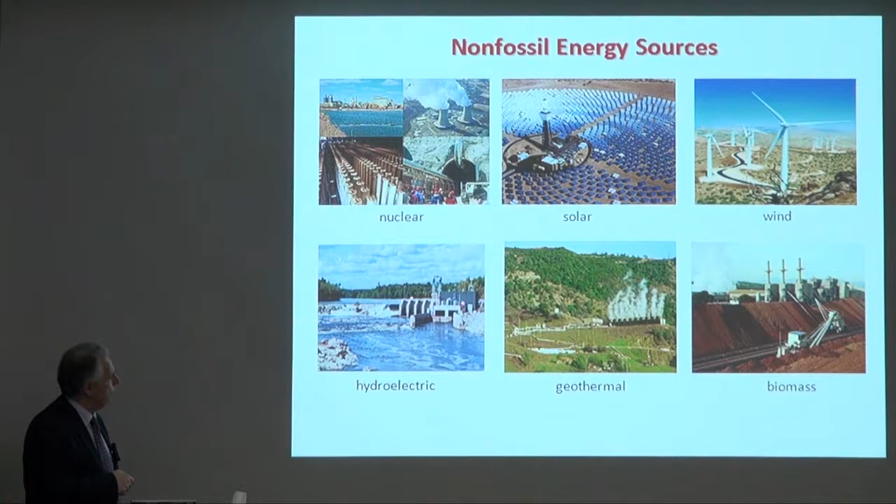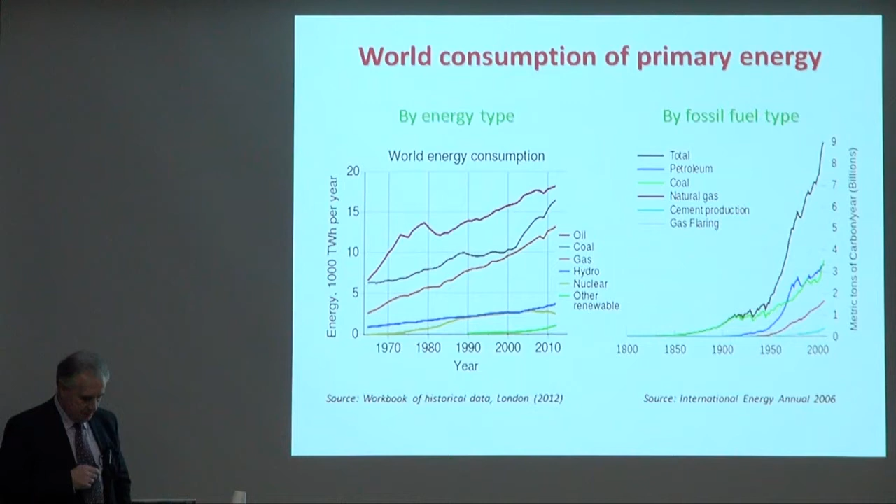Returning to fossil resources, it's instructive to recognize the needs and demands as the years go by. We can see the demand by energy type and by fossil type, showing a constant upward trend, even sharper if we go by fuel type. The most compelling conclusion is that oil, coal, and gas are the main driving energy resources in the world. Demand is increasing as more countries enter technological eras requiring more energy resources, while the availability of such resources does not increase proportionally, resulting in a sharp total increase in more recent years.

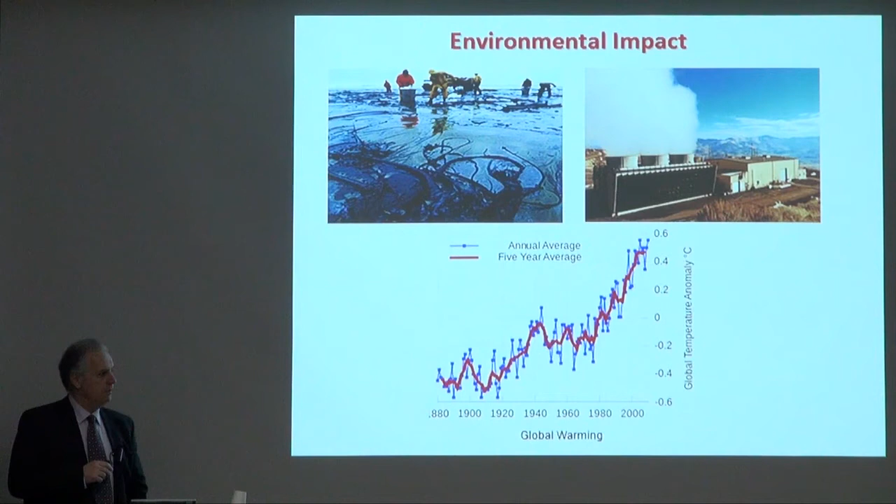This comes with an increasing penalty to the environment we live in. We have seen oil spills that deplete the water world, and emissions from various plants that deplete the atmosphere and the air we breathe. We have even more significant global changes, like the so-called global warming effect, where you can see a gradual increase of temperature on our planet, with implications affecting local microclimate conditions, such as in the North Pole, with more melting of ice affecting the underwater world and other parts of our planet.

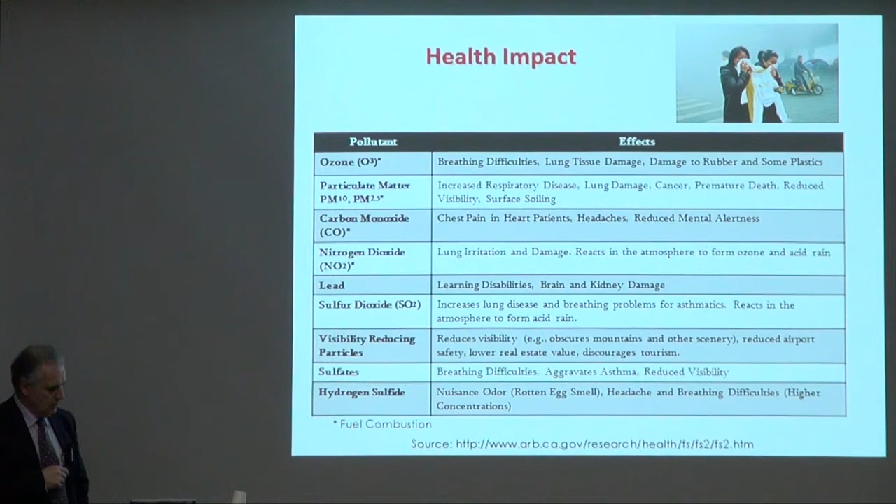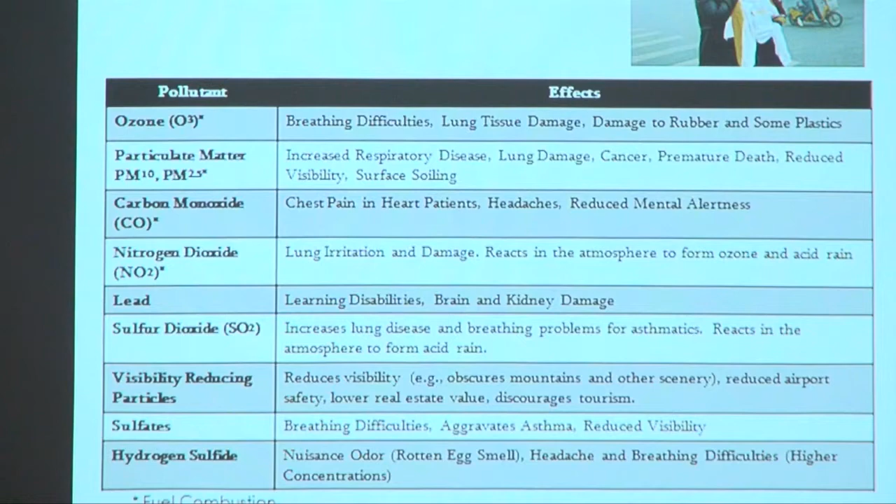In the case of health, an increasing concern in our days due to these emissions, we have depletion of the ozone layer, and emissions related to microparticles, carbon monoxide and nitrogen dioxide, lead, as well as sulfur, sulfates, and hydrogen sulfides, all emitted during the combustion process, whether from factories, plants, automotive applications, or even biomass.

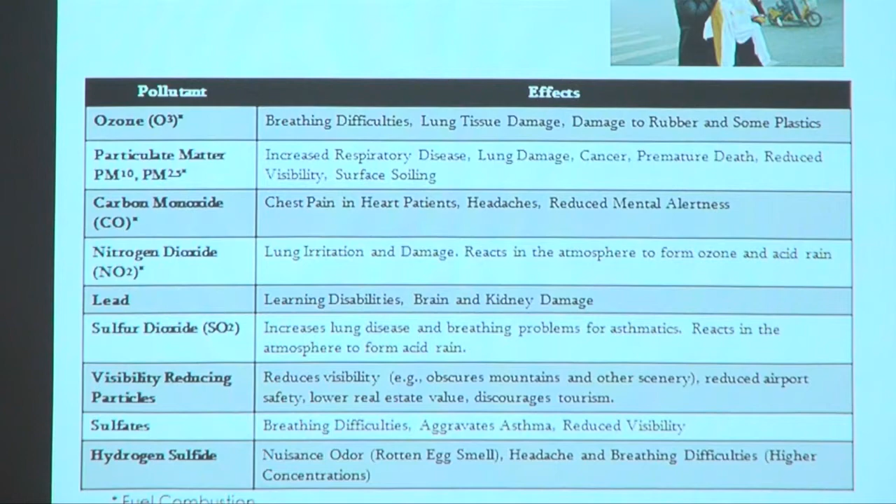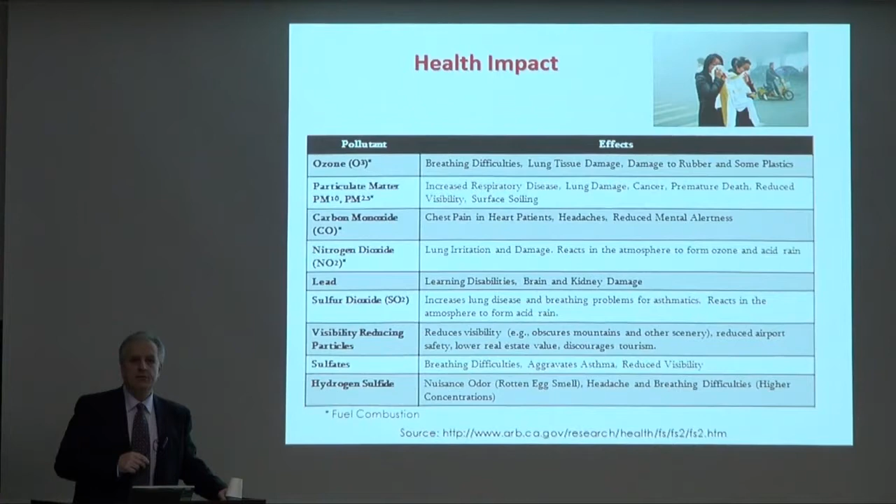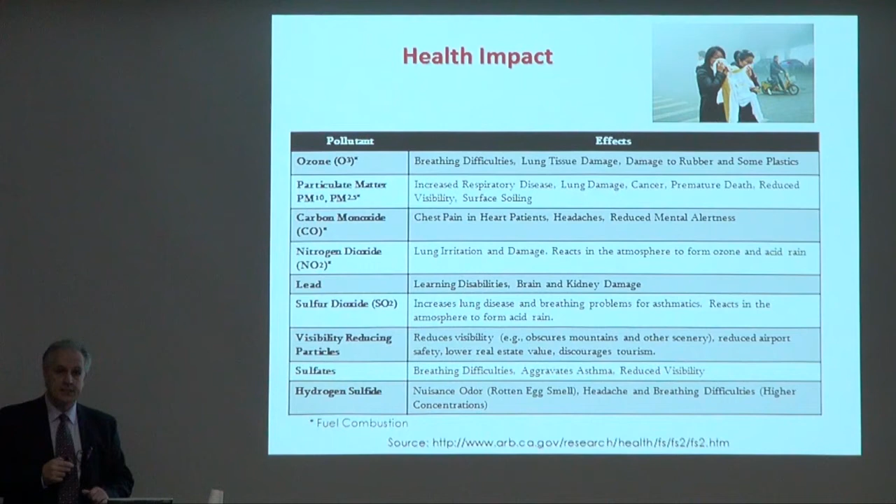Many people assume that technologies or resources that do not use fossils are going to be a solution to health and environmental problems, but they underestimate the process by which this energy is converted efficiently. The process behind involves a lot of manufacturing, which can lead to emissions of its own kind, and therefore this has to actually be counted into the equation.

The main air pollutants can be classified as primary and secondary pollutants. In the primary category, the main role is played by COx and NOx emissions, along with some others not in our control, such as those related to volcanic eruptions. Secondary pollutants are usually substances not emitted directly, but formed in the air by primary pollutants through interactions that take place. These emissions can lead to secondary products that occur in the atmosphere, including the ground level ozone effect, which is one of the reasons we observe photochemical smog effects.

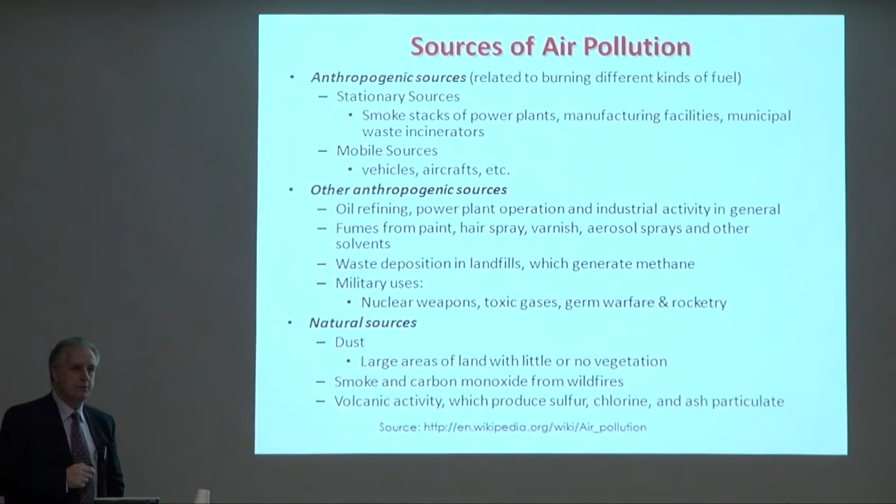Sources of air pollution are important to recognize, first as anthropogenic - these are the ones for which humans are mainly responsible, created by human needs. So we have smoke stacks of power plants, manufacturing facilities, and mobile sources of pollutants such as vehicles and aircraft that produce them. These have come from our needs for a different style of life and different comforts that require different technologies, and these technologies do not come free of penalties - penalties that are depleting our environment and consequently impacting our health.

Other anthropogenic sources are listed here, including nuclear and toxic gases. Fertilizers that are used also present some health problems, and some other daily used products that we underestimate also contribute their impact. In fact, I would add air conditioning to this list as one of the main means of depleting the ozone atmosphere - one reason being that the lubricant used for air conditioning contains fluorocarbons, and the fluorine released is one of the main factors that depletes the ozone in the atmosphere.

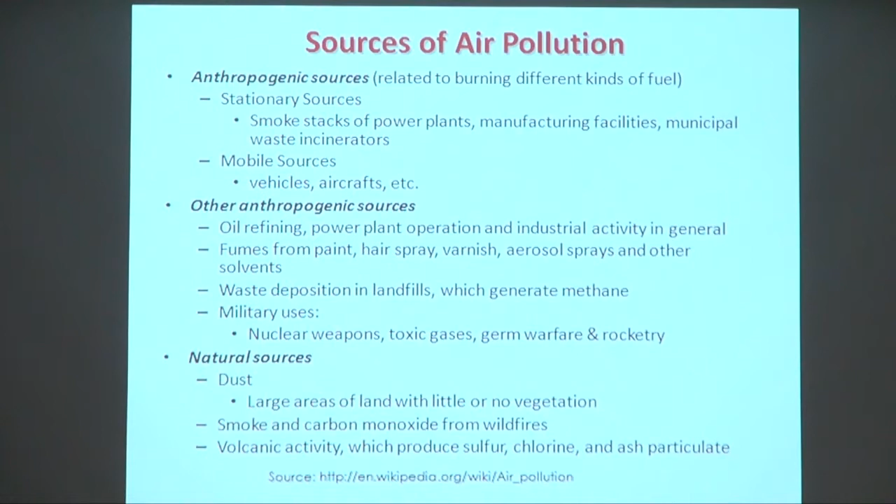We also have some natural sources that add to the list of sources for air pollution. So here we can see air pollution emissions.

As people become aware of these problems, you can see a trend to minimize total emissions, but nevertheless this trend is not as steep a slope as we would like, especially as statistics of various health problems increase—we started collecting them since the 80s—and recognize the importance of even these levels of pollutants still being very high for our health.

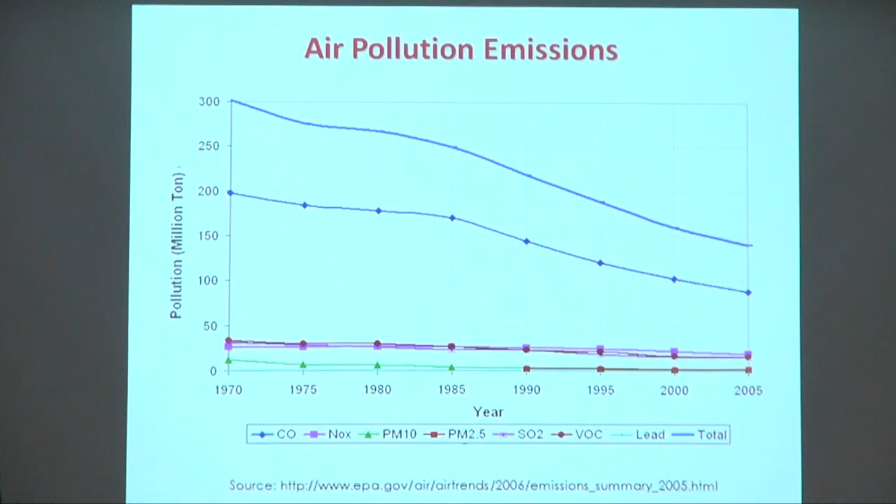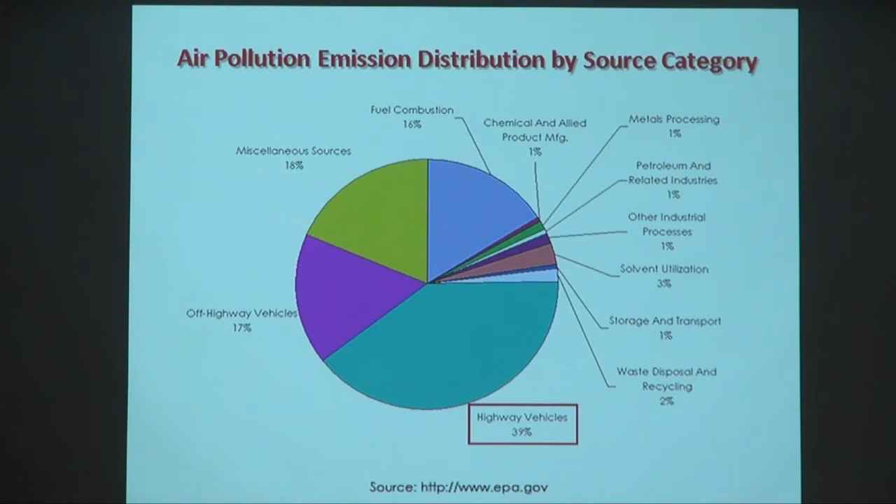If we look at this by sector or source category, we can see the main category is highway vehicles, constituting a major part, and also off-highway vehicles and other miscellaneous sources, as well as production manufacturing plants. These four are the main sectors from where the largest level of pollution and environmental impact is coming, and of course they are drawing the most attention.

And if we look at the pollutants associated with emissions, then as expected, we see CO and NOx being the main contributors.

So having reached that point, it is clear that if one needs to begin to address this problem, he or she will have to draw attention first to the biggest slice of this pie, which is air pollution, especially associated with automotive—either highway or non-highway vehicles—and manufacturing plants that produce emissions contributing directly or indirectly to CO and NOx. So my talk today is going to focus on these products that result from the automotive sector.

But before I do that, let me add that the increase of these emissions of CO and NOx, in terms of some quantitative numbers that add up to these percentages, is an indirect effect of the presence of elements like phosphorus and sulfur, which are main ingredients in additives used in synthetic oils for gear oils or engine oils, to maintain efficiency and optimum combustion by reducing friction and wear between various interfaces of these mechanical systems. But these additives, while effective in lubricating vehicle components, contain phosphorus and sulfur, which turn out to be

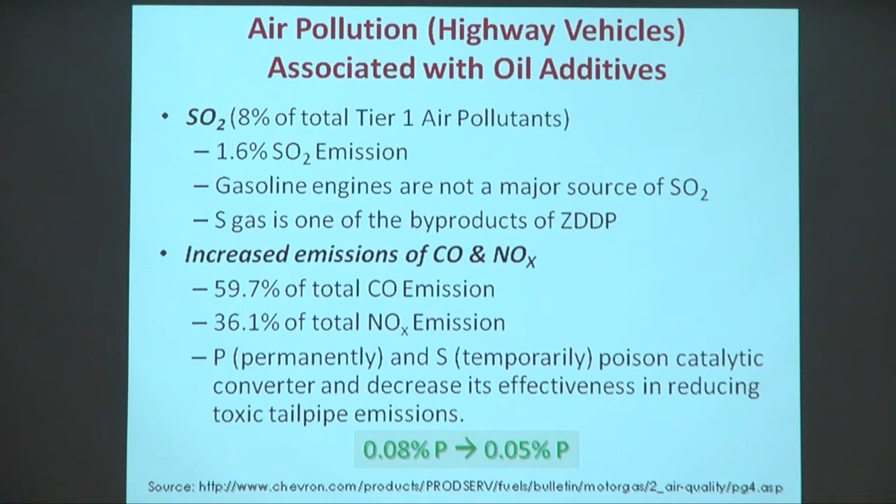So one of the challenges I will try to address here is: what if we try to do a gradual step in the right direction, which appears huge for the oil industry, to reduce some of these important elements that have made these additives, for more than 40 or 50 years, the prime additives this industry uses. In particular, phosphorus, to reduce it by about half in terms of its content. You may be surprised these numbers are very small, but additives represent a very, very small fraction of the content of oils, yet their effect is much far-reaching.

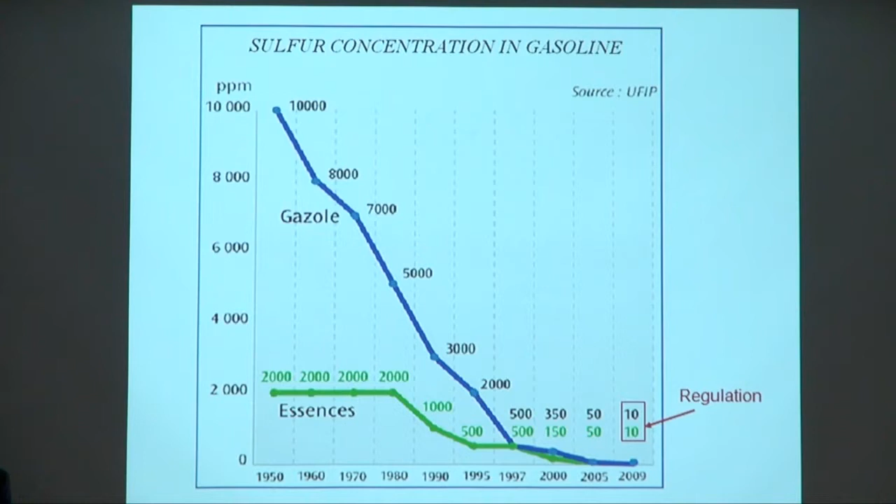And so here you can see the attempt to reduce the presence of sulfur in gasoline, to clean the sulfur gasoline better, with the years approaching tighter levels, and here is where the present levels of regulation exist.

So let's focus on the theme of how we can reduce air pollution contributed by highway vehicles, and what possible scenarios one can immediately identify. Well, one would be to reduce highway vehicle usage, but this appears to be going in exactly the opposite direction. More vehicles are appearing on the highway, especially as people find it easier to buy them, and also because public transportation in many parts of the world is not as efficient as it needs to be so that vehicle use can be avoided.

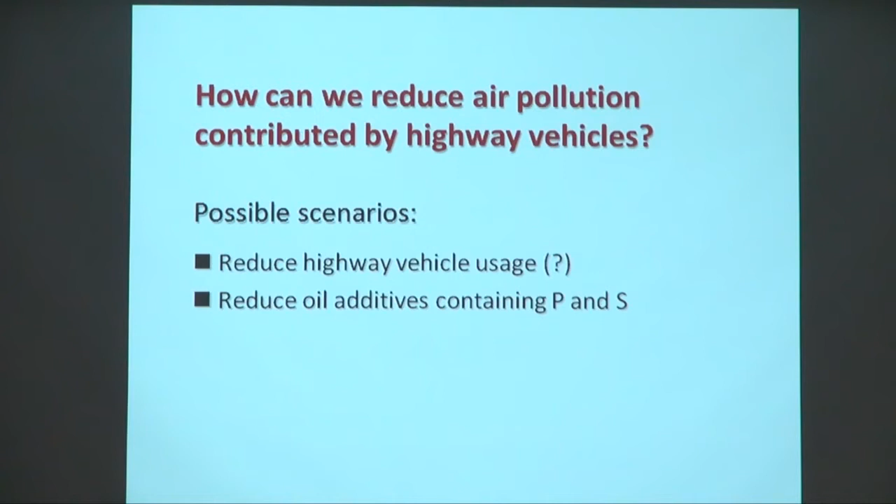Another possibility that seems more plausible is to reduce the causes of the problem. As in the medical field, you have to identify the cause of a disease in order to cure it. And this, as we've seen, appears to be these ingredients, these additives, which are phosphorus and sulfur.

The most common additive used by the automotive industry is zinc dialkyl dithiophosphate, a name longer than my last name, which fortunately has an acronym, ZDDP, while I don't have an acronym. So we will refer to it from now on as ZDDP. This is a long chain molecule that contains phosphorus, zinc, and sulfur, and it's incorporated into synthetic oils.

Today we will learn what its main role is in protecting engine parts by reducing friction, therefore improving the efficiency of the engine, and improving wear resistance by forming protective tribofilms. I refer to them as tribofilms because they form through the rubbing process. Tribo, as in tribology, which we mentioned before, so it's a chemistry that is not equilibrium chemistry. It involves rubbing between the surfaces.

The rubbing process activates those surfaces, causing these molecules incorporated into the synthetic oils as additives to break up, react locally with the surfaces, and form these so-called tribofilms to protect those surfaces.

So the pros and cons that come with these additives: they reduce catalytic converter poisoning, increase lifetime efficiency, reduce CO and NOx emissions, and reduce SO2 emissions. So if we reduce them, we can accomplish many things that point in the right direction to minimize emissions and improve our environment.

But the con is that we will probably reduce the wear protection. These are also referred to as anti-wear additives. And we will reduce the life of the engines, the reliability of the engines, and so forth. So how can we gain all of this without losing all of these things?

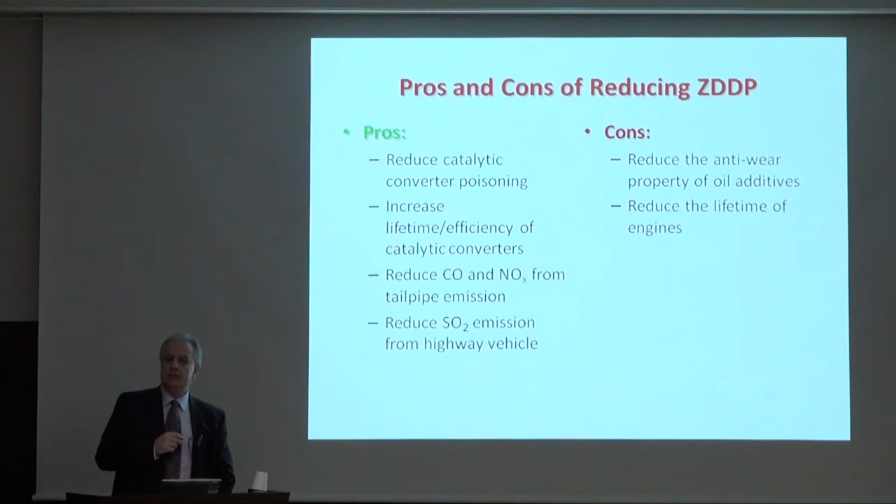Obviously that requires innovation. And that's one message I want to send to the students: always try to think out of the box. This is a term we often coin in the US, indicating that you should not always follow conventional wisdom or the learned approach, because that only gives you incremental changes. Sometimes to revolutionize a field or direction, you need to think out of the box differently.

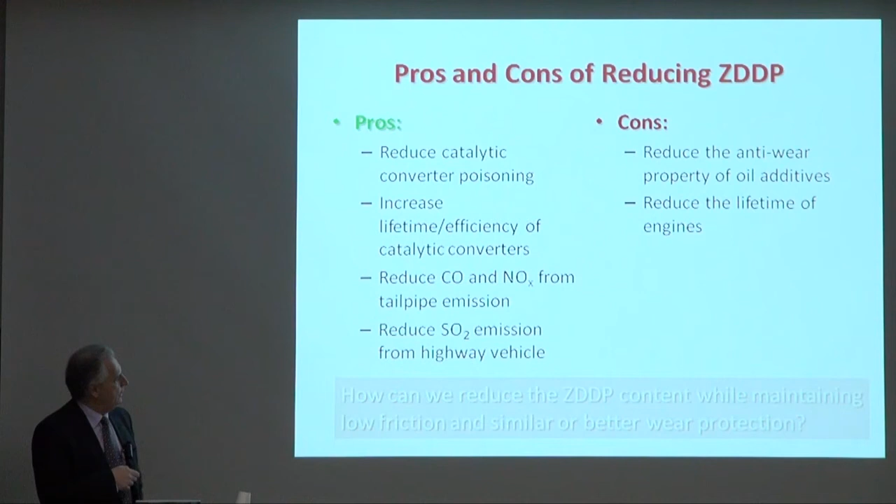In cases like this, you have to think out of the box, and instead of trying only to reduce the content of these and worrying about these problems, be innovative and think of what other elements that are not depleting the environment can be used instead of phosphorus and sulfur. So how can we reduce the content while maintaining low friction and low wear, better wear protection?

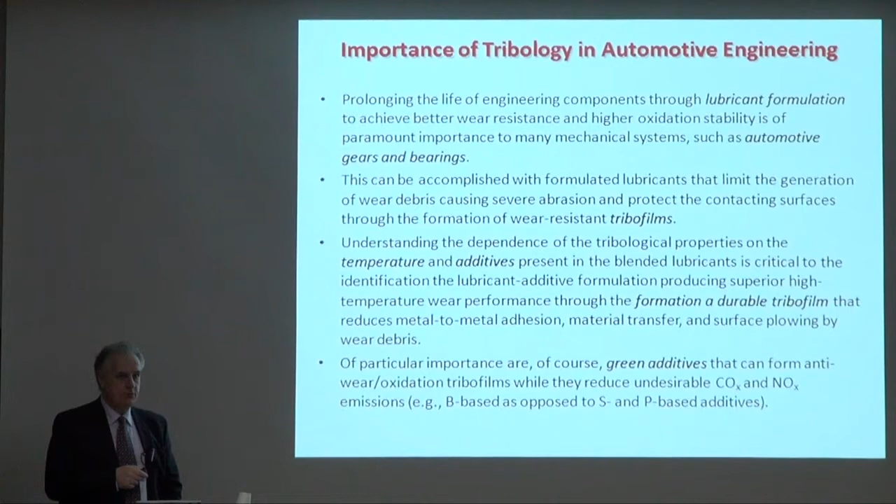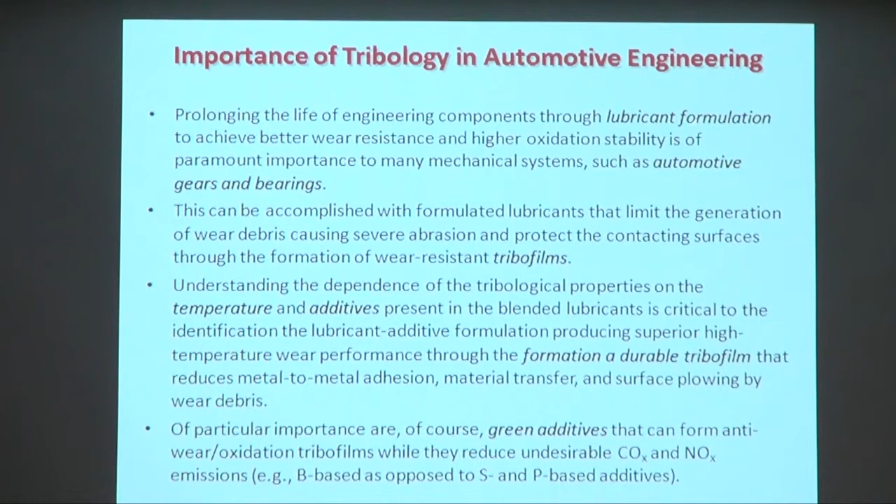Okay, so let me summarize this first part by indicating the impact of tribology in automotive engineering. Because this is a busy slide, I will focus on the italicized words. We're looking at lubricant formulations that will achieve better protection for automotive components like gears and bearings. This can be accomplished through formulated synthetic oils.

These oils will produce wear-resistant tribofilms that protect our surfaces, but we want to make them without additives that can be hazardous for the environment. They have these additives that, at the temperatures we'll encounter, react to form these protective films that will still lead to durable tribofilms without containing phosphorus and sulfur additives.

An example you'll see me present today is using boron instead of phosphorus. We've seen earlier that reducing the content of phosphorus by half is a major step in that direction. Let me give you a quick reasoning of why we use phosphorus and sulfur and what role they play, which will become more obvious later.

Sulfur forms sulfides and sulfates, which are easily shearable phases. If we have those in the tribofilm, we'll produce low friction. Phosphorus forms hard, glassy phases, which provide wear protection in the tribofilm. So the tribofilm is a mixture, a biphasic material made of soft and hard phases that synergistically provide low friction and wear resistance. But because of the softer phase, it wears out, and that's why it's referred to as a sacrificial film.

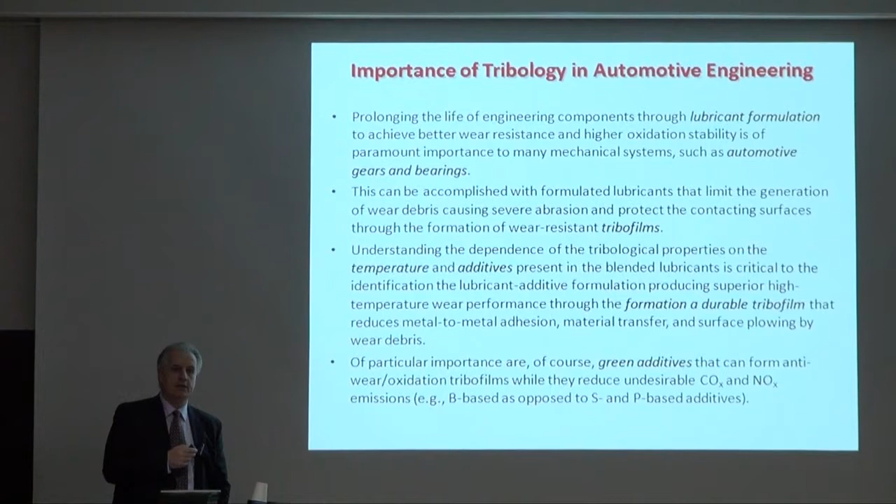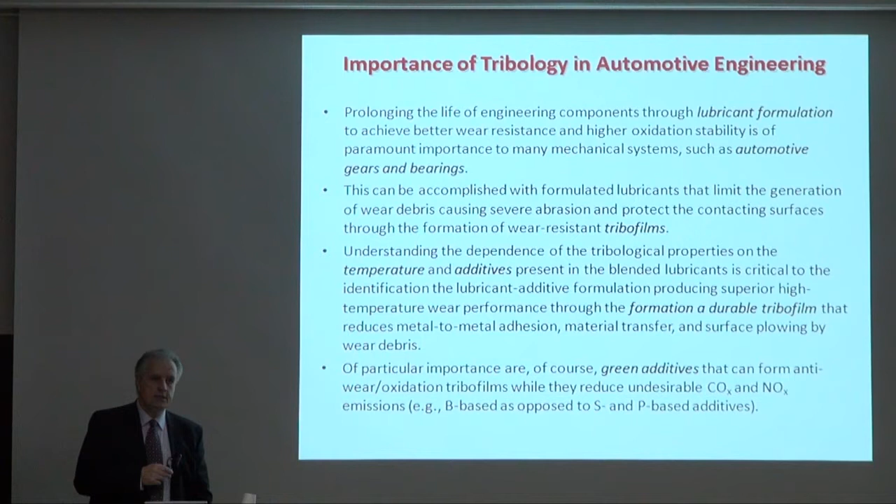The role of the additives is to immediately intervene and reform the film everywhere on the metal surface that has been removed. There is a continuous affinity of the surface for these additives, which are broken up and activated by the rubbing process to strongly adsorb on the exposed metal surfaces every time the tribofilm is locally removed or worn off. This process leads to continuous reformation of the tribofilm, which is why it's referred to as a sacrificial film, because it sacrifices itself to protect the precious engine metal underneath.

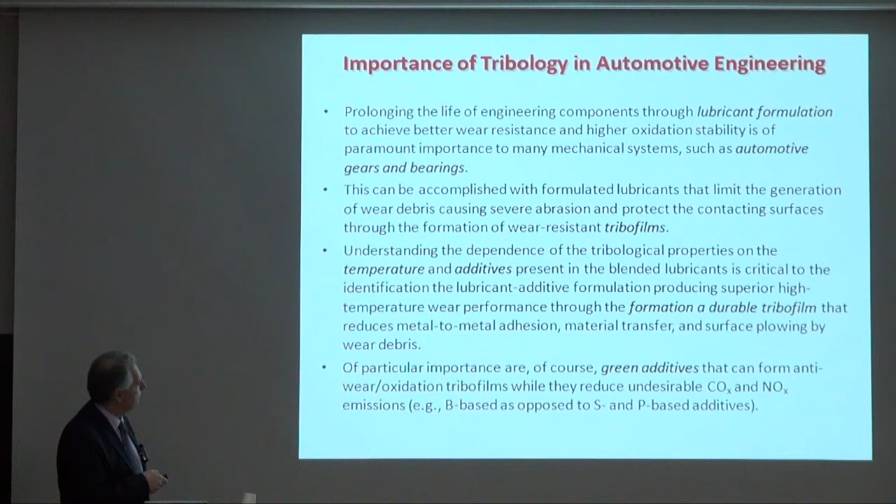So why would surfaces wear out? We ask the question: why is energy dissipated when we bring two surfaces in contact and begin to slide one relative to the other?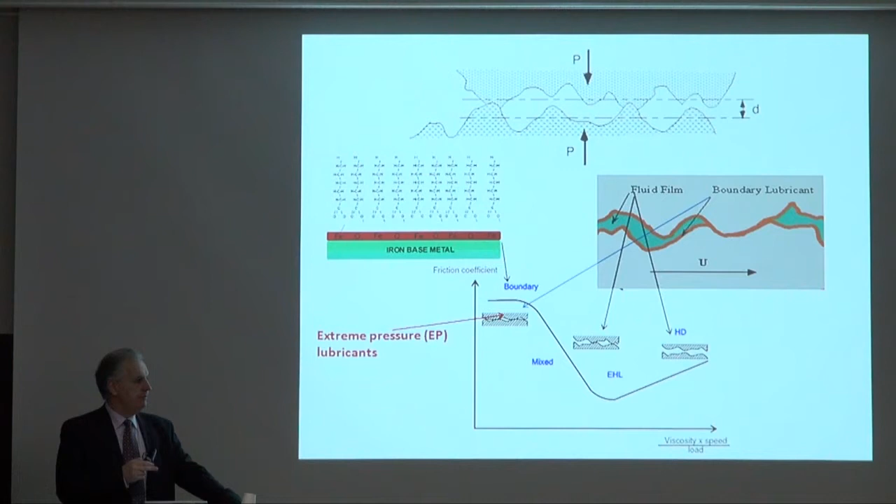If we look closely into these interfaces, we observe that although macroscopically these surfaces have been faced, polished, and smoothened, and are very well maintained in terms of tolerances, at the microscopic scale they still have some roughness. Regardless of how much you press those two surfaces against each other, they will never become 100% in full contact or full mating, but will continue to interact at the higher peaks of these protrusions, which I will refer to as asperities.

So asperities on each surface come to interact with the asperities of the other surface. If we calculate the pressure transmitted through a seal based on its apparent area and the thrust load applied, we'd be surprised to find wear of this seal despite the pressure being very low, because the actual pressure the seal sees is much higher due to these stress raiser points, the asperities.

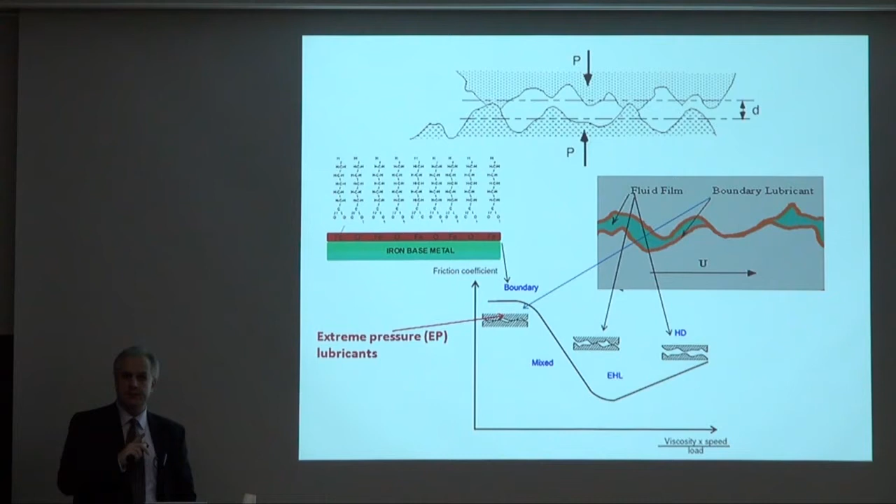You can think of the load as parallel lines of constant stress. This is the nominal stress you calculate by dividing the load by the apparent area. Think of this stress as current lines passing from one surface to the other. There is a vacuum here, a void, and they cannot pass through it because it's a high dielectric material, so they must detour and pass elsewhere. This detouring causes a traffic jam, which in more scientific terms represents stress concentration or stress gradients. High stresses arise because the stress lines that were going to pass from the void all pass from the same point instead. So the local material sees 3, 4, even maybe 10 times higher local pressures than what we think the material is experiencing.

If we add a tangential force when we start sliding, you can see how easy it is to begin wearing out this material, and the process starts at these microscopic asperities where the two surfaces wear out. Then the gap increases, and we get leakage into that seal, or vibrations into the bearing surface that has been roughened as these asperities are removed.

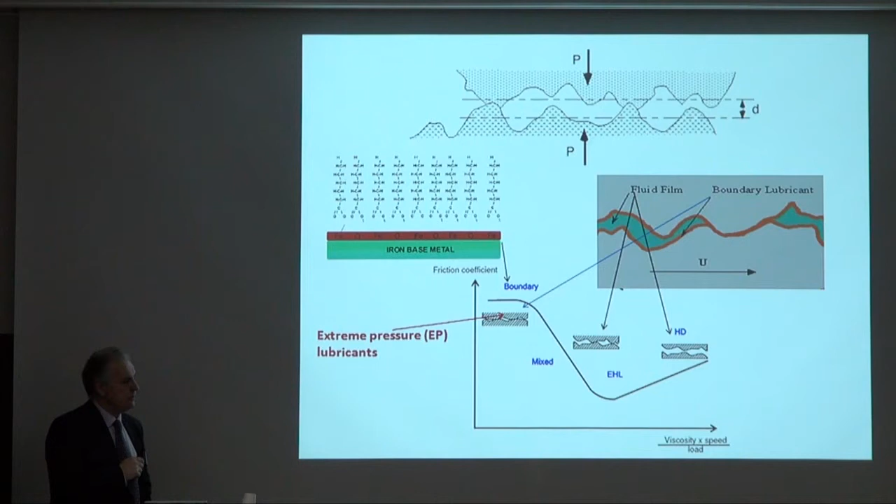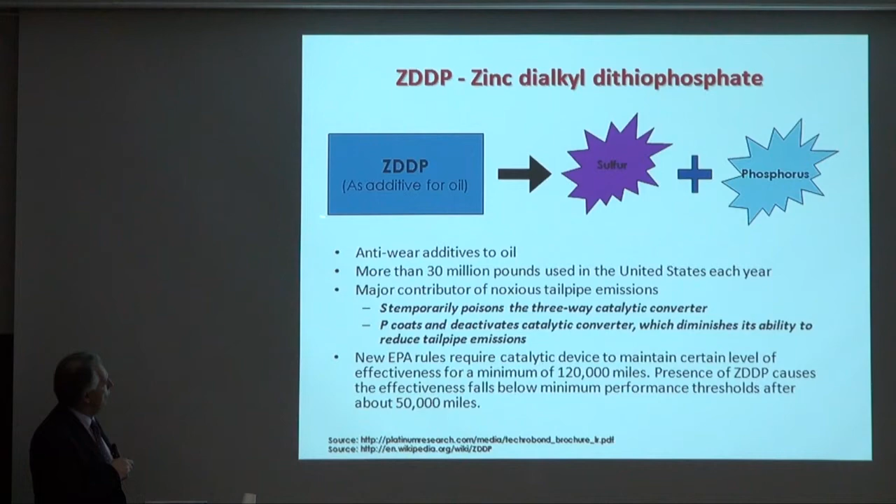So we said zinc dialkyl dithiophosphate is one of the prime additives in oil, but unfortunately it has sulfur and phosphorus. Although this is the anti-wear additive in oil, and we sell more than 30 million pounds per year in the US alone, it's a major contributor to tailpipe emissions.

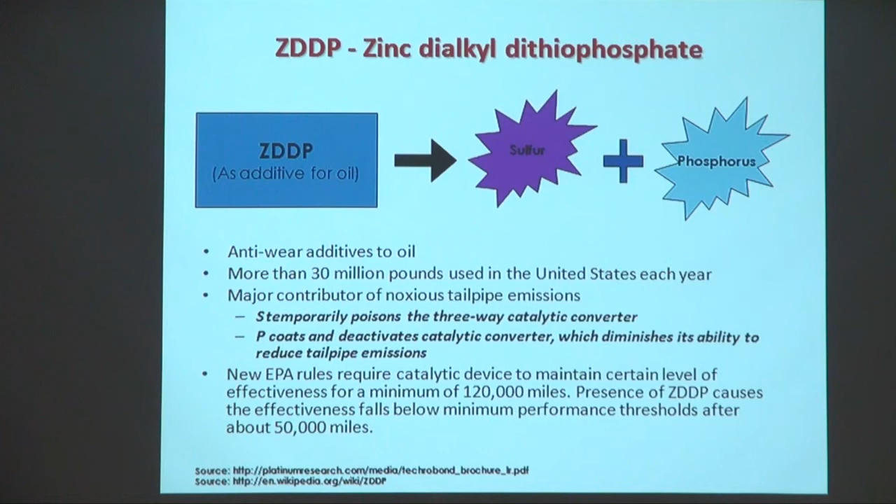The sulfur temporarily poisons the catalytic converter, and the phosphorus coats and deactivates it. That reduces its ability to reduce tailpipe emissions and also upsets the optimum combustion cycle of the engine, causing further implications.

So let me start by looking at what we can do to address this problem for gear oils, and later in my talk I will also refer to synthetic engine oils.

Let's look at a gear lubricant. A base gear lubricant, referred to as base gear oil, usually contains very small amounts of sulfur traces, to a point that if it was used by itself, it would not be a problem for the environment.

Here we have also white oil as a control sample. This is the most inert oil you can have. It's basically rich in naphthenic hydrocarbons, an oil that does not react with the surfaces. Only the molecules will tend to attach to the surface.

Blends 1, 2, and 3 are the base oil on which we incorporate a new material, boron, with reduced levels of phosphorus, compared to the zinc dialkyl dithiophosphate.

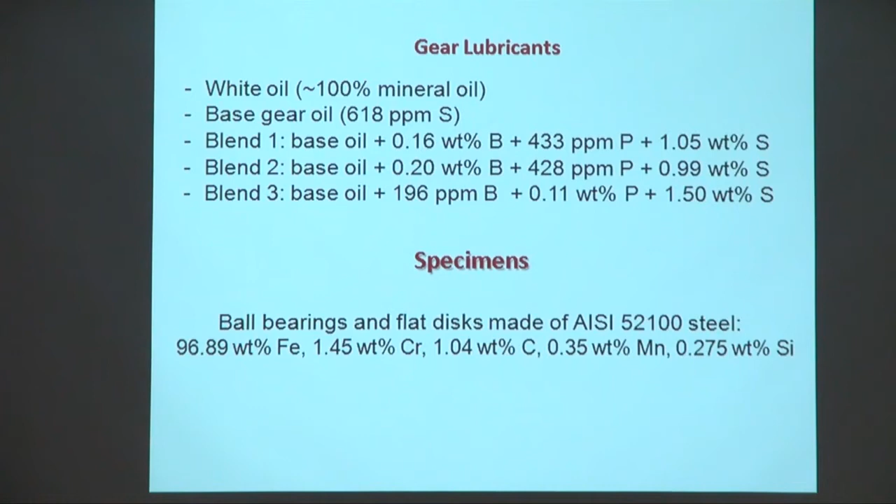So we will be looking throughout what I present here at bearing steels, standard bearing steels. We are not going to bother with tweaking the chemistry of the steels, typical 52100 balls sliding against a disc in the presence of these different oils.

So let's take first a look and see what typical features we can see at low temperatures and high temperatures. You can think of this as the engine being relatively cold when you start the car, and this could be a hot, maybe more than the typical high temperature, sort of an upper bound, worst case scenario of the temperature of the engine after steady state.

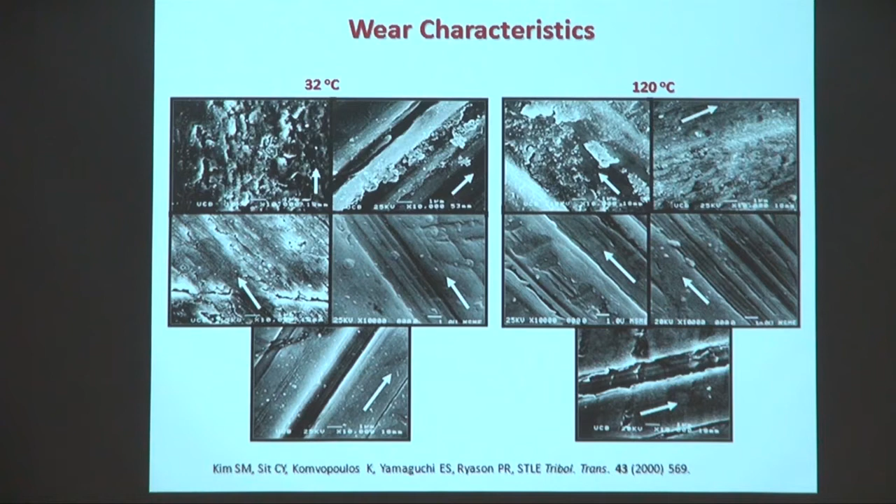At higher temperature, chemical reactivity increases. But the actual temperature could be much higher because of the rubbing process. When the surfaces slide at their asperities, the local temperature is much higher due to frictional heating. So the actual temperature is not just 100 or 120 degrees, but could be much higher during sliding, and that is a critical factor to induce these reactions between the additives to form the tribofilm.

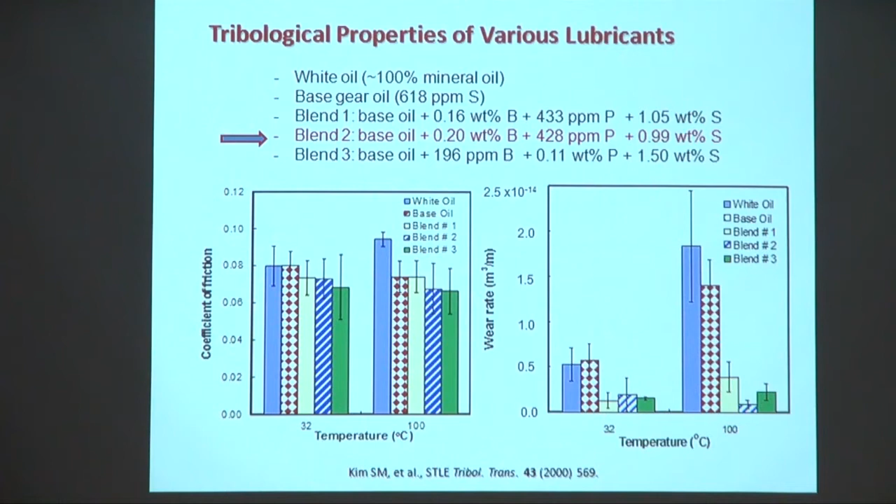This is a difficult experiment in every sliding case, I should admit, because it's a field where you don't actually see your specimens. In about 90% of engineering or biotechnology fields, we can see our specimen or the surface of the specimen. Here we're dealing with interfaces, sliding interfaces, which are hidden. So we need to develop in situ methods to determine what goes on in these interfaces as they slide.

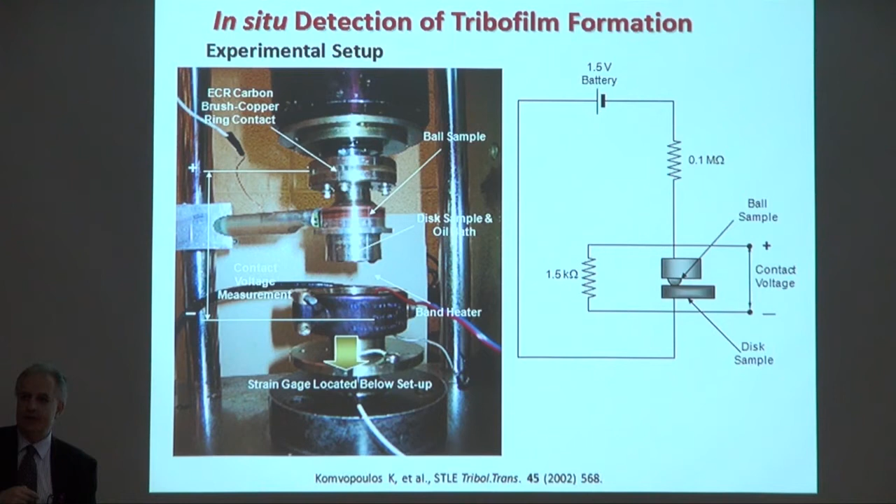Usually sulfides are conductive, phosphate phase is insulating, borate is also insulating. So if the film contains phosphates or borates, it should give a high contact voltage, increasing as the film begins to form. If it doesn't contain any of these, even though I've incorporated them as additives, that means the reaction did not occur and the tribofilm did not form, or it was removed much faster than it was trying to form by the wear process.

So let's take a look at what happens. I took out the mineral oil, so now we have only the base oil, and then the base oil with these different formulations. Remember, the second was the one we saw was the best performing. If we look at the coefficient of friction and contact voltage for the base oil that has very little sulfur, we see high friction and fluctuating friction, with 0 contact voltage.

You may ask about the iron oxide, whether it's an insulator and should have produced a contact voltage. This is, first of all, very thin and very fragile. If it's something very thin, you can still have tunneling through it, so you get zero resistance. Or more importantly, if it's fragile, it's removed, and therefore you have no voltage.

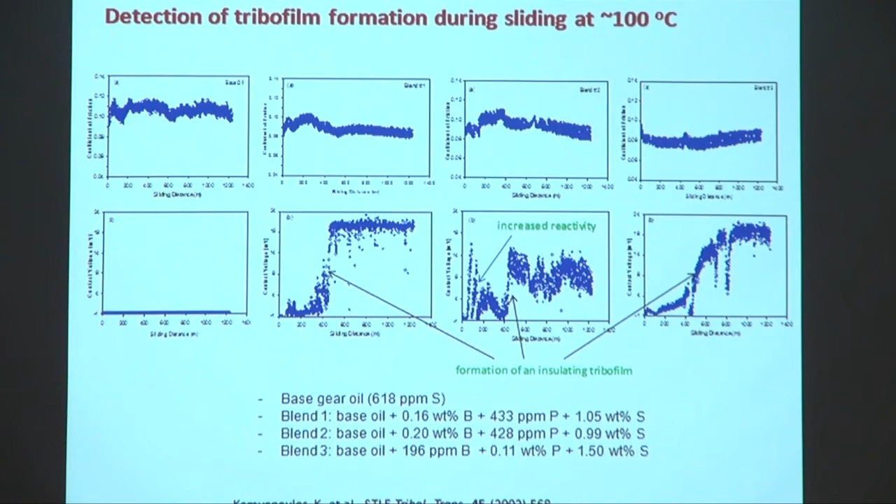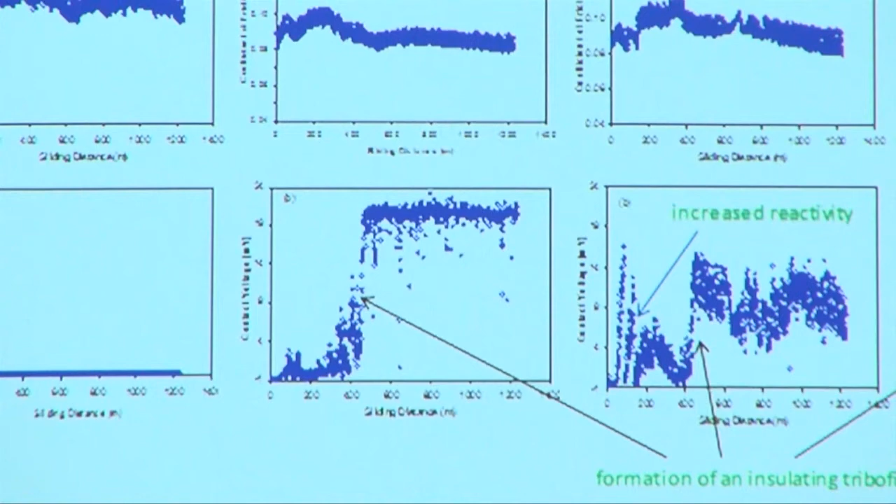Now in the case of blend 1, we can see we have an incubation period, some activity is happening, the voltage fluctuates, and after sliding for some time, we have a sharp rise and establishment of a high contact voltage at steady state. At the same time, the friction begins to drop. In the case of the second blend, we see that this is more unstable, but it starts to form earlier.

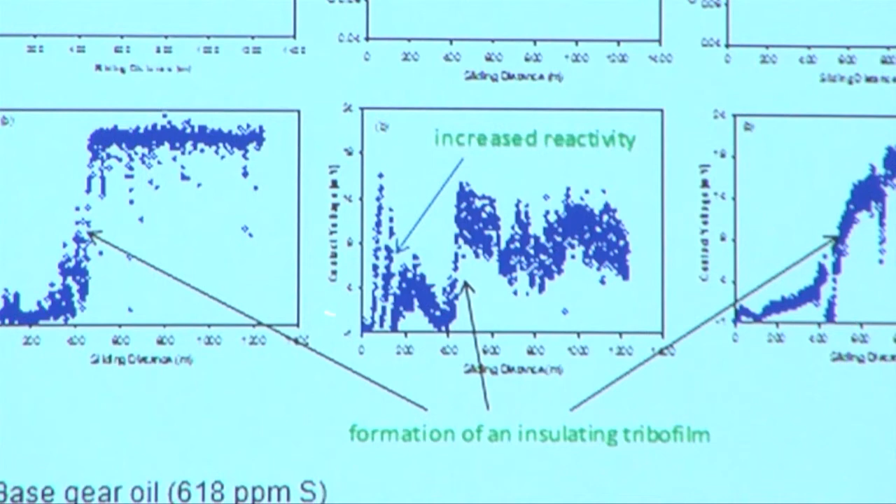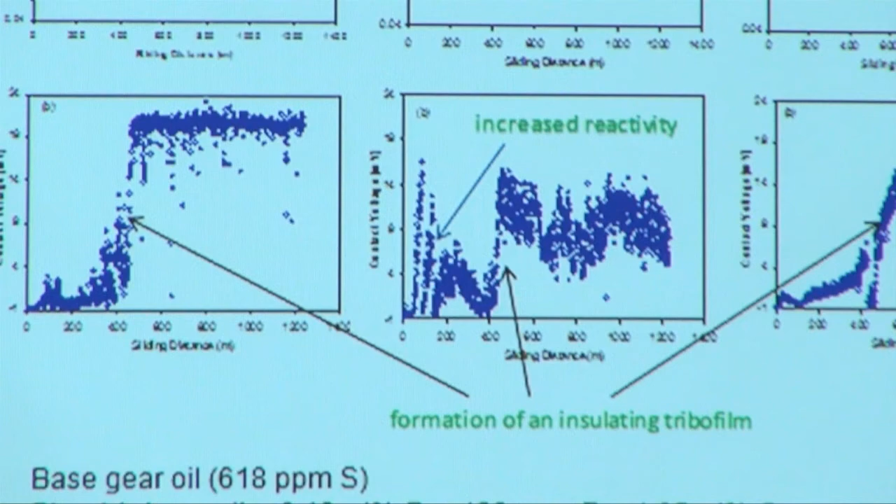We can see these sharp spikes and fluctuations of the contact voltage that is no longer zero, reaching a steady state that is more fluctuating than this, but overall producing better wear characteristics. These fluctuations may indicate that it's rapidly removed and reforming, as opposed to this one being mostly formed and very slowly removed, but this one may have better wear and friction characteristics because of its different composition.

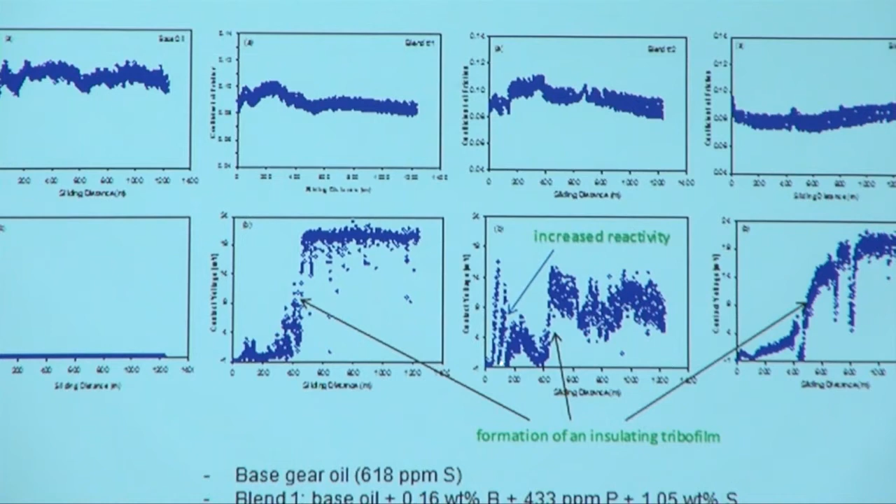So with this contact voltage, we can determine the formation of the tribofilm and how long it takes. This one takes less because it starts sooner than this, which is important because it indicates the reactivity, the chemical reactivity we have between the surfaces and these additives.

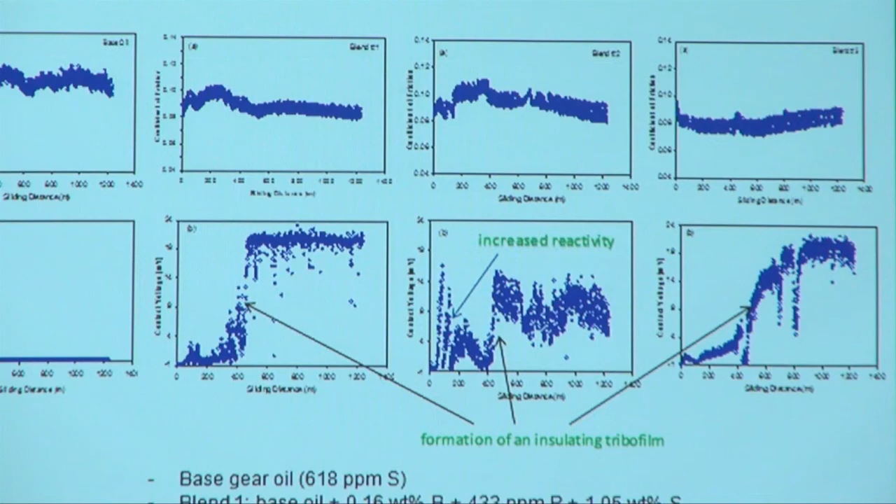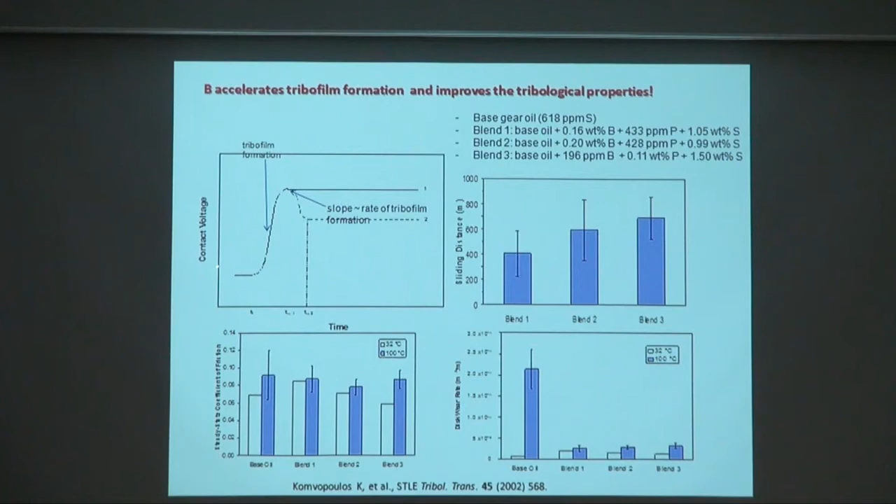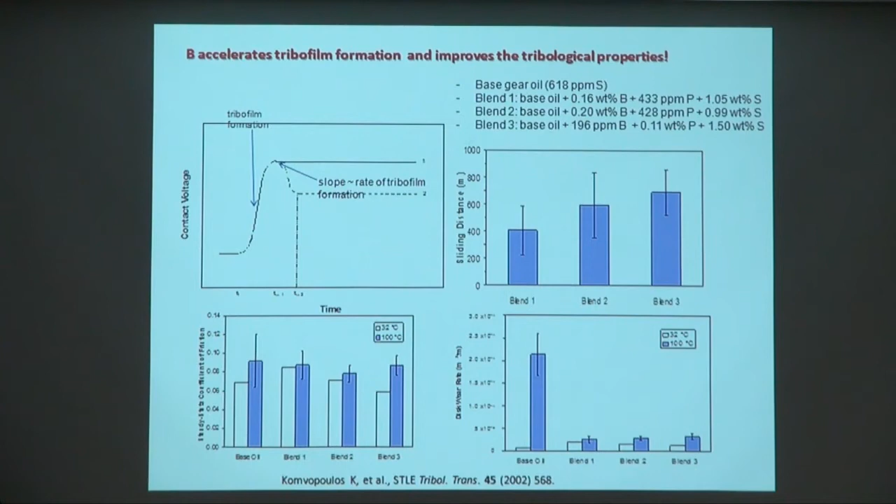So to further understand this tribofilm formation, we can say that the friction coefficient or the contact voltage has an incubation period where the surfaces become activated. When you have rubbing, the two surfaces will be electrified, and you will have charges building up there. The formation of these charges can contribute to catalysis when the molecules of these additives break apart and you have charges there. This can contribute to reaction, and that takes place in this range.

So when we reach a critical stage of activation, we have the chemical reactions taking place and the film is forming and reaching a steady state, or slightly dropping, but reaching a steady state that is non-zero.

And so we can see here that the sliding distance for these three blends increases, but the most important is the wear coefficient for the base oil and the two blends at these two temperatures, how much it has been reduced by these additions of boron and reduced sulfur.

So here we're going to think again out of the box and say, okay, people have been using metal deactivators to stabilize the fluids from becoming deactivated by metal ions. And they have never bothered to think of whether this can also provide, at least partially, the same work that these phosphorus and sulfur containing additives can do. So what if we study if they have any effect?

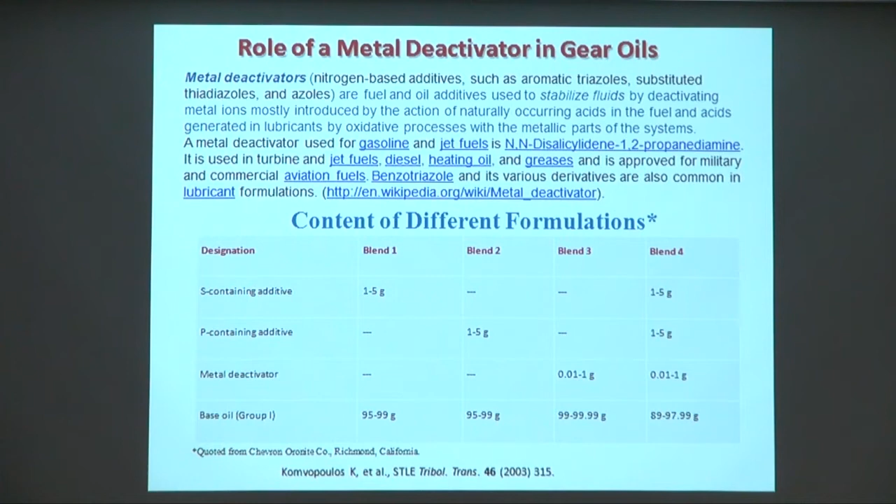And again, using the same method, we can identify the formation of these tribofilms. In the base oil, we see the same thing: high friction at both low and high temperature, zero contact voltage. In the cases of blends 1, 3, and 4, we don't see the formation of a film. Remember, I have repeated here the formulation so that you can see what we are talking about. Blends 1 and 4 contain sulfur, and this one does not contain any phosphorus or sulfur, so it's just the metal on itself. So they are all either metallic or semi-metallic, and that's why the contact voltage does not increase.

But it doesn't mean that the film is not forming, as indicated at high temperature by the sharp drop of the friction coefficient. So we can see here that the film formation is not captured in situ, but it is happening as the friction decrease takes place.

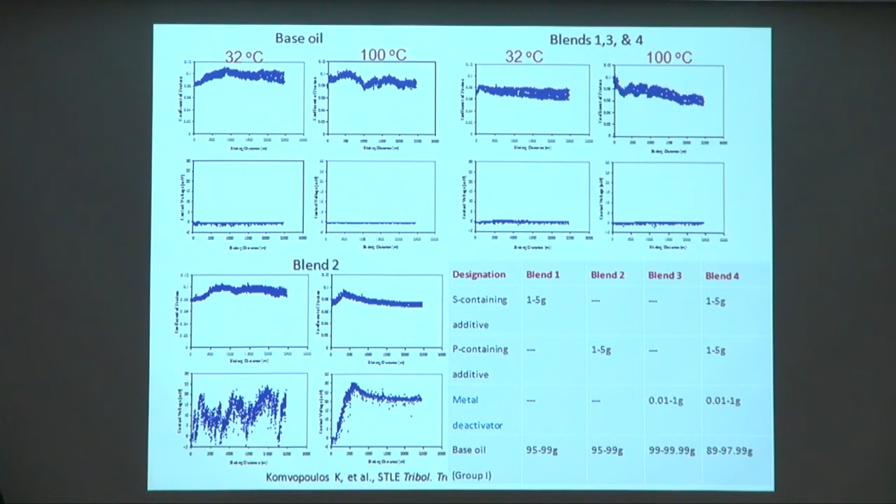But blend 2, which has phosphorus, we can see begins to form the film and rapidly fluctuates. This means an unstable film at temperatures that are not enough to induce rapid reactions so that the film can rapidly form. But if we go to 100 degrees C, we can see that the film, as soon as it forms, stabilizes, and it's always forming much faster than it is worn off.

So if we take these chemistries with the metal deactivator and compare them, we can find again that these blends, which have reduced phosphorus and sulfur content but now have the metal deactivator, are actually behaving equally or even better compared to the competitor, which is the last one that contains the full phosphorus and sulfur and very small amounts of the deactivator. So you can see blends 2 and 3 here, especially at the high temperature, which is the shaded one. Blend 2 has the lowest wear compared to the other cases.

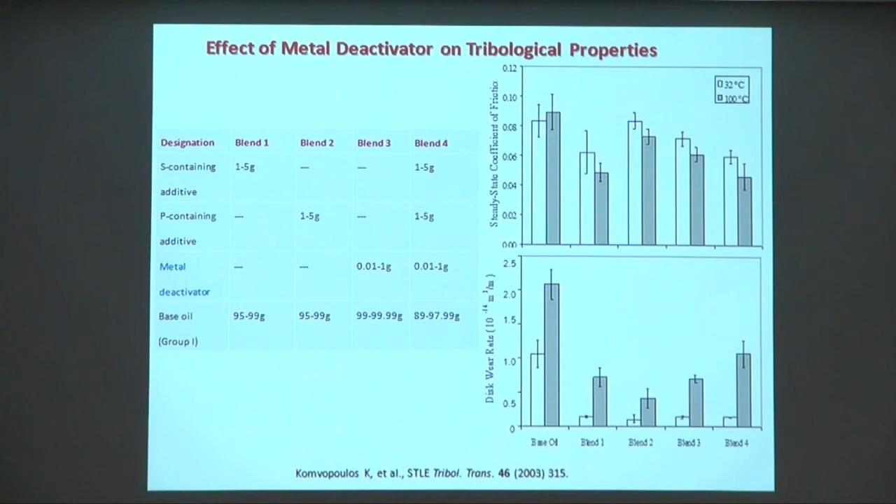So again, we have replaced one of the elements that we want to remove from these additives to improve emissions. And this gives us some further idea of the formation of these films. Recognizing that once we change the chemistry, the reactions that take place with the sliding metal surfaces can cause different wear mechanisms to take place.

Often in industry, they tend to say whether we have mild, medium, or severe wear, and that is not really revealing how to solve the problem. You need to know the mechanism. What kind of wear mechanisms? There are various types by which material is removed, such as abrasion, adhesion, delamination, plastic flow, and you can see the morphologies that we have here when these films are forming or not forming, what is happening.

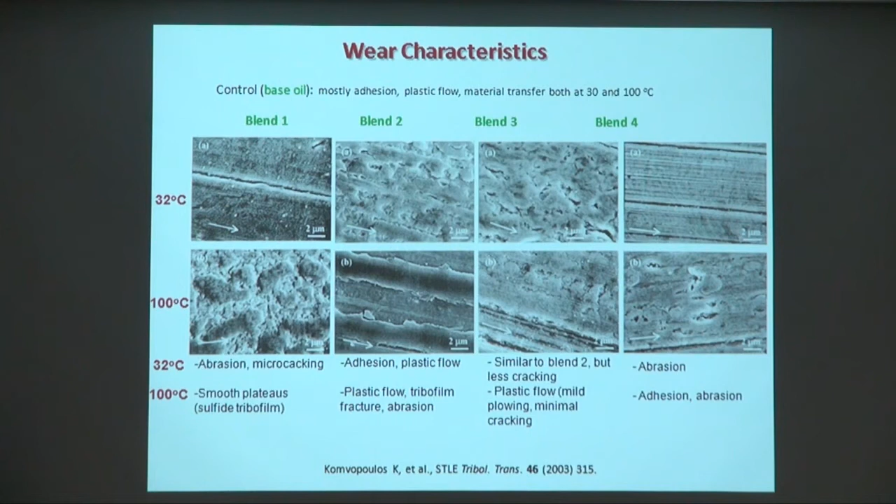For example, here we can see a film that has formed and actually has confined rubbing only at its higher peaks. These are the highest islands. You can see the rubbing process that has changed their color, but is protecting the surface, as opposed to this film that is too brittle. The formulation that was used here was producing a brittle film that is breaking off, but if this exposed metal rapidly reacts with the additives to reform it, as happened here, then that can also be a possible solution that we can accept.

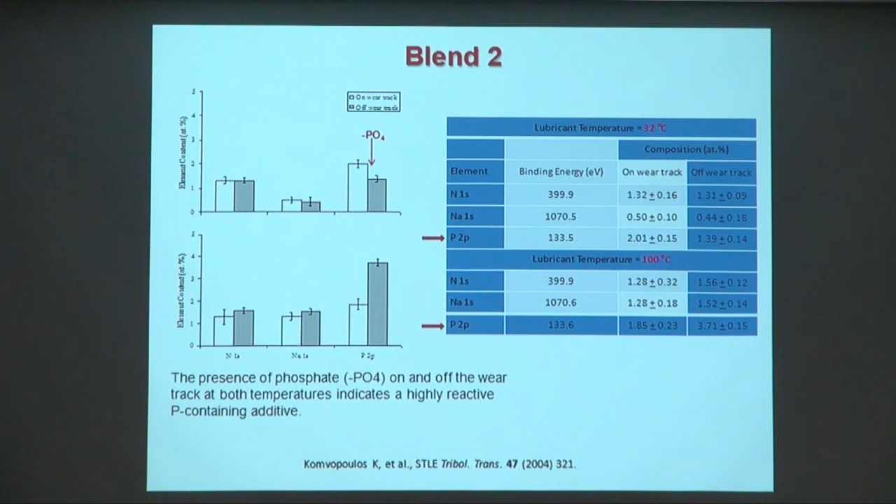I will skip the chemistry. This is XPS that shows the composition of the films, in order to go to the summary of this.

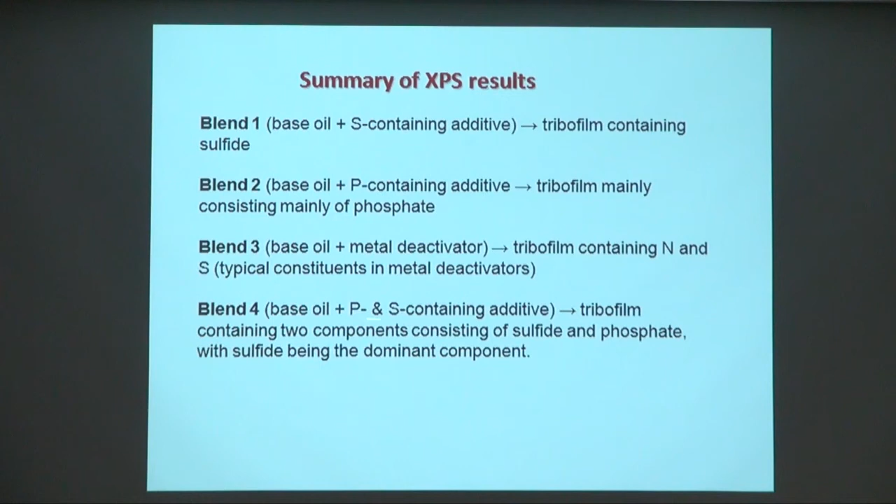So what we can say about these gear oils: the first blend that had the base oil and the sulfur-containing additives had a Tribofilm formation that was sulfide but was not protective. The second blend that has the phosphorus additive formed a film that was mainly brittle, containing phosphates. And blend 3, that had the metal deactivator, had the Tribofilm that contained nitrogen and sulfur. This is what the chemical analysis showed, which are typical constituents of the metal deactivators. This was performing better than that, and even better than that, which is the phosphorus and sulfur containing oil.

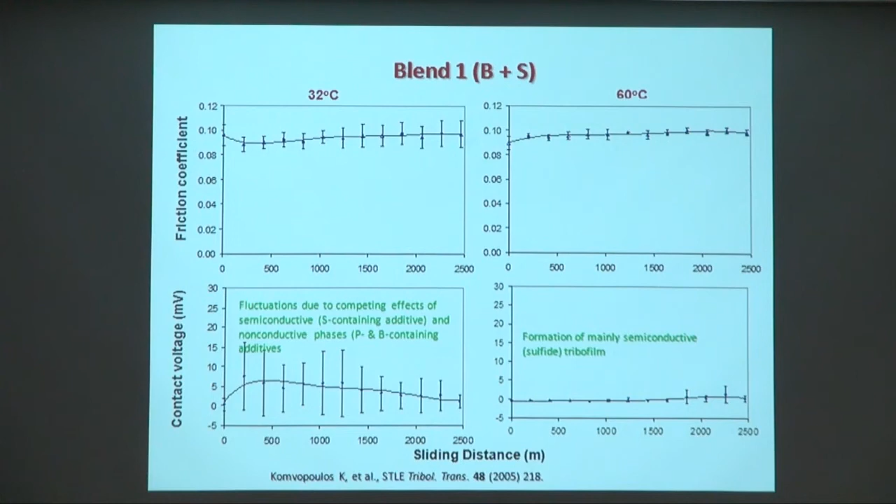How are we doing with time? I have to speed up. So let me skip this and go to the engine oils.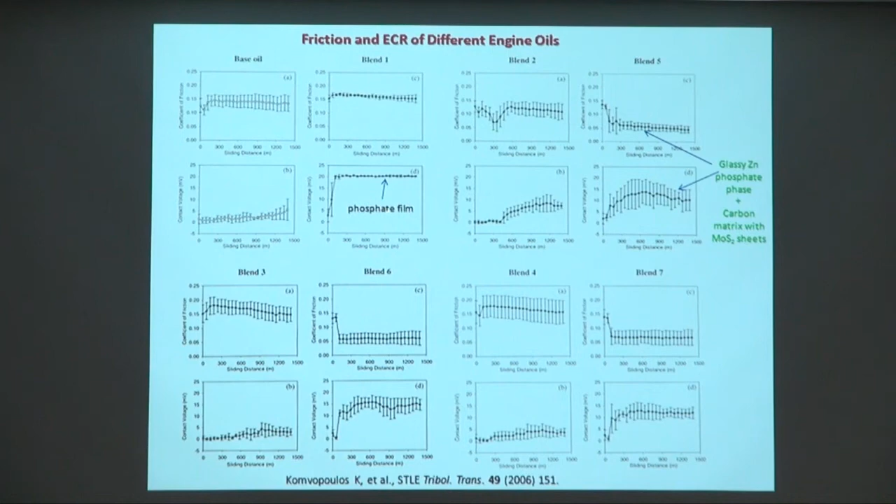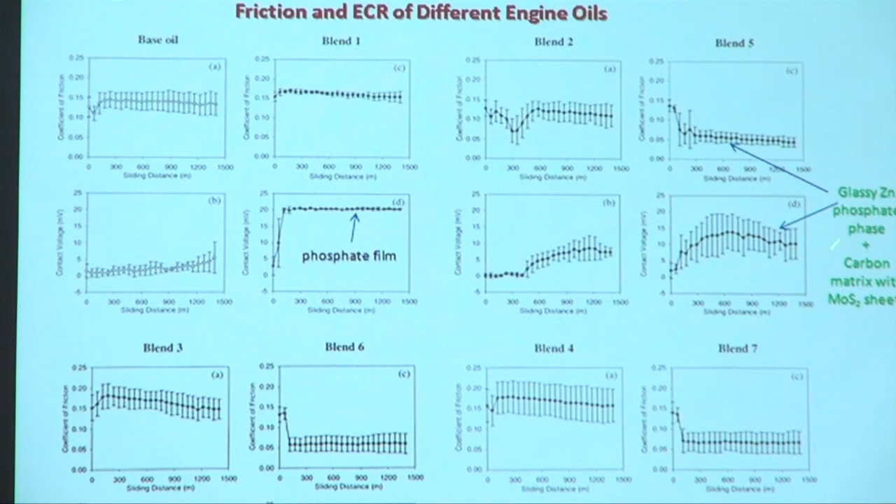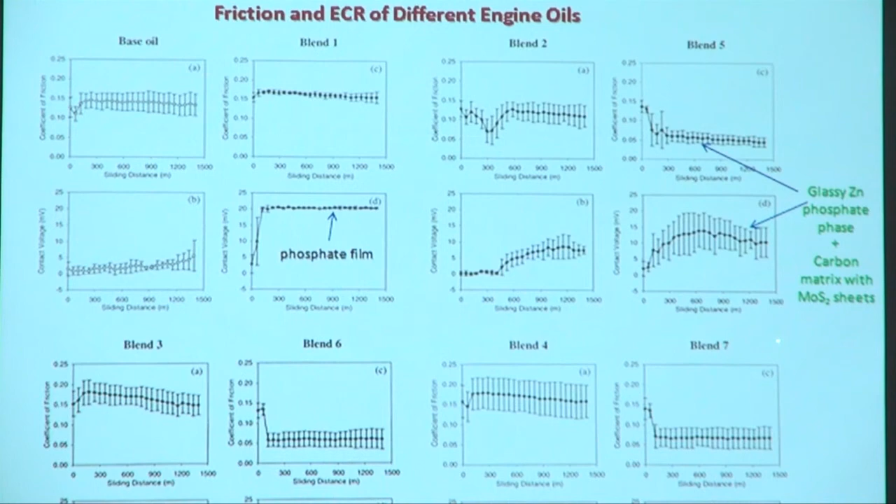So this is a busy slide, of course, but it's comparing base oil blend 1, 2, 3, 4, 5, 6, 7, and so forth. I'm drawing your attention here that the film is forming as the contact voltage indicates — that's a phosphate film. And here as well, this is the blend that has the ZDDP and molybdenum, so we can form hard phases that are glassy in nature because of the presence of phosphorus and zinc, and soft phases like molybdenum disulfide because of the molybdenum content, which is known to be a solid film that lubricates the surfaces.

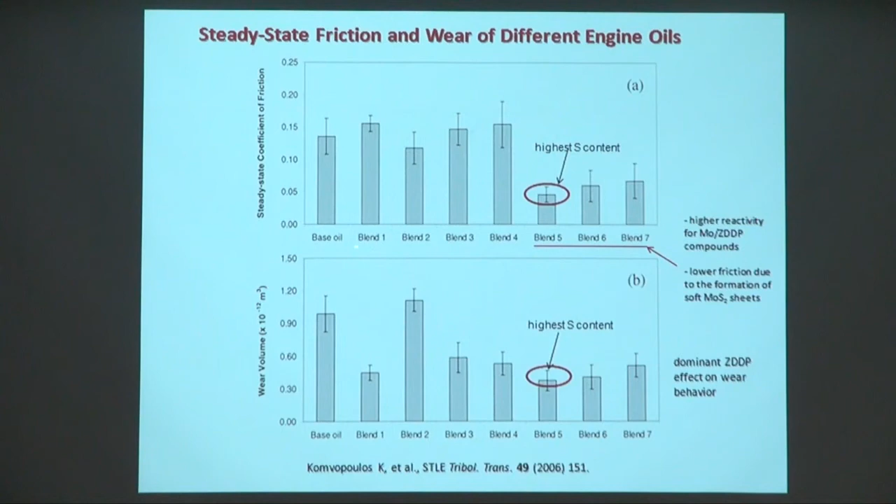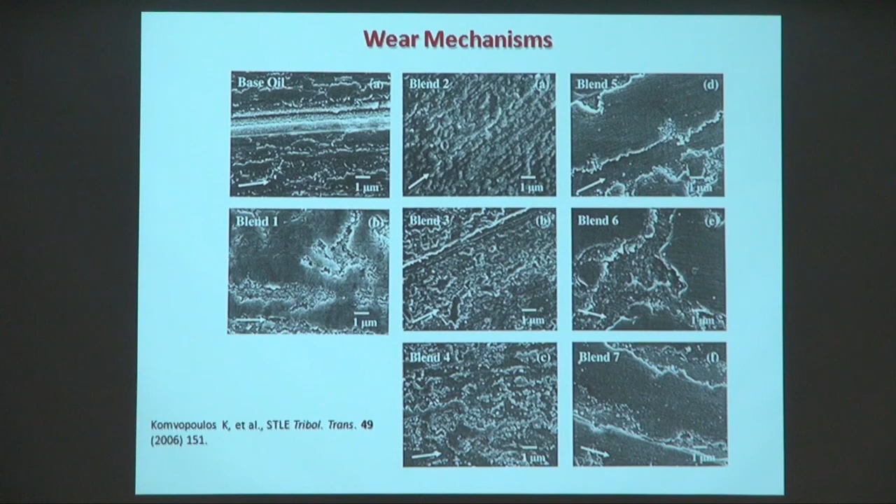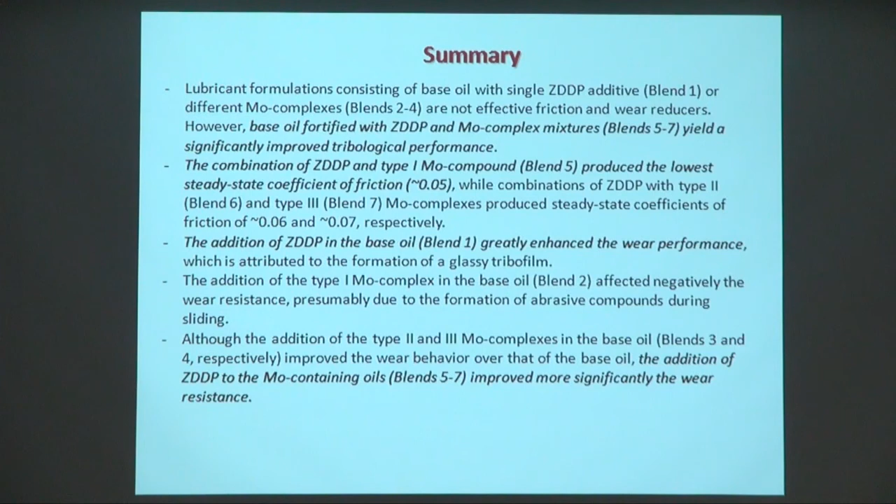Again, similar information we can extract from these pictures as far as the wear mechanism. So the combination of ZDDP and type 1 molybdenum compound produced the lowest steady-state coefficient of friction of about 0.05. This is very low friction for the boundary lubrication regime. Also, the incorporation of ZDDP into the base oil greatly enhanced the wear performance, but we know that this is not what we want to see — we want to replace this. This was accomplished by including these molybdenum-containing oils that improve significantly the wear resistance by replacing the phosphorus and sulfur elements that are present in the ZDDP.

And the last example of non-conventional thinking is to think about the role of detergents. Detergents are also incorporated in synthetic oils. As the name indicates, they tend to clean the engine from undesirable compounds, but no one has thought whether they can replace, at least partially, some of the additives.

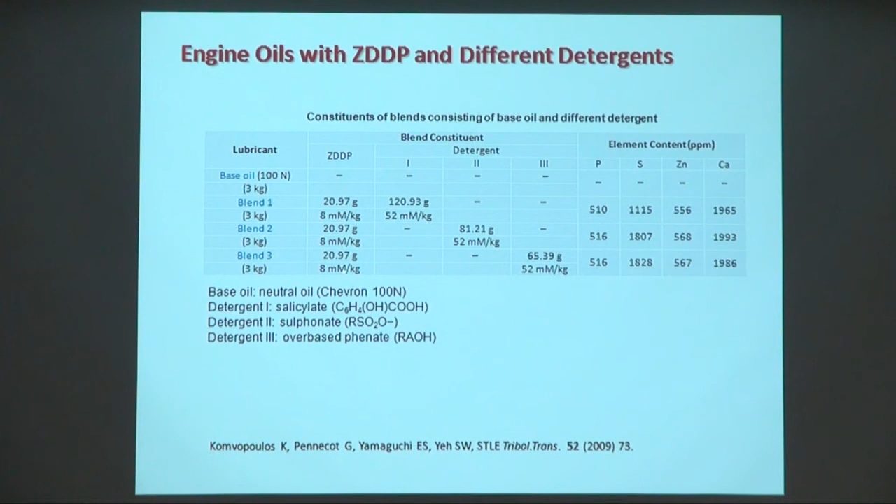So here we looked into the effect of these detergents. You can see different detergents here that are incorporated with the ZDDP, with reduced levels of ZDDP.

What you can see here is that if we plot the wear rate as a function of load applied to these wearing surfaces, initially we have no wear or positive wear. Positive wear indicates that the tribofilm is forming faster than it is removed, so something is deposited on the surface instead of having loss of material.

And there is a transition to negative wear, that is loss of material, that is affected by these different blends. We can see that blend 3 has the higher load carrying capacity. It has to go even at 6 or 7 kilograms before it starts producing wear. Any loads below that will not cause the material to wear out.

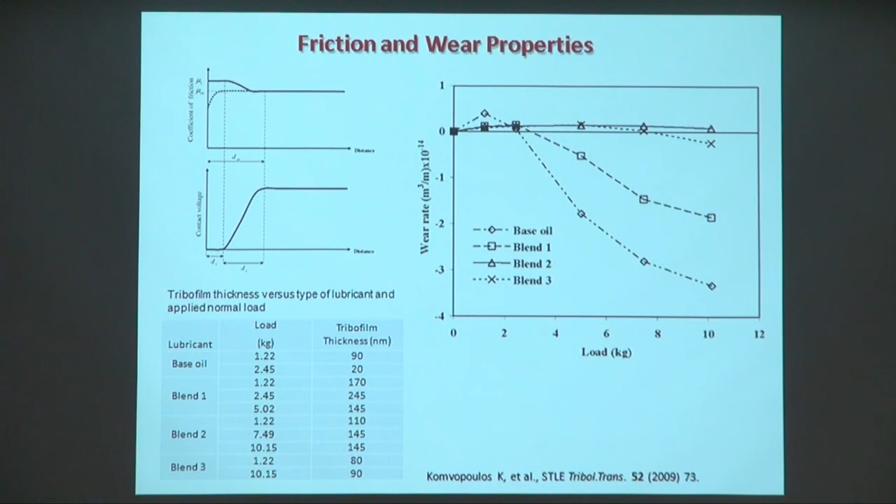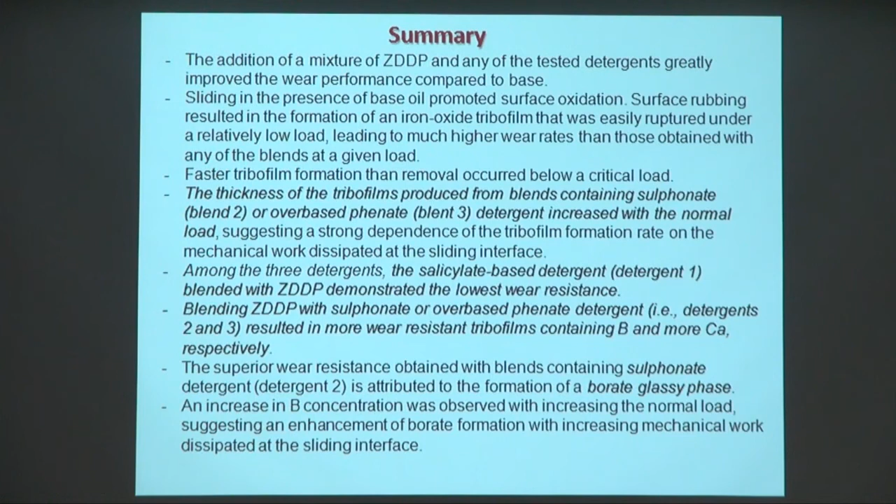So let me summarize here that the addition of ZDDP and the thickness of the tribofilms we have seen here was affected by the presence of these ingredients, and blending with these detergents, especially with the one that contains sulfonates or over-based phenate detergents, resulted in more wear-resistant films containing boron, primarily boron. So this is the order by which these detergents, the detergents are in the parentheses here.

This was the number 3, number 1, and number 2. The base oil has the lowest wear resistance, and then the next was higher, was blend 3. Blend 2 was the best.

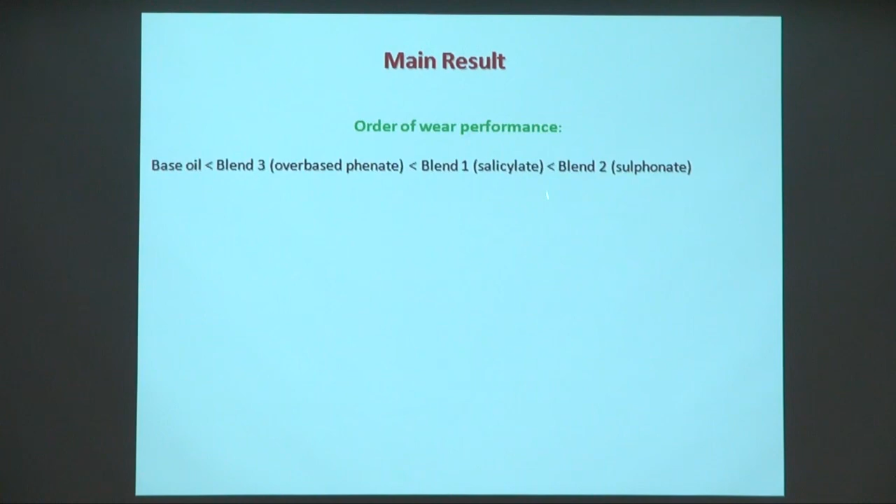So let me finish by emphasizing what we discussed here and what we learned today, that we have all recognized that there is a lot of growing demand for consumption of energy that has led to almost tripling the consumption in the last few years. The majority of the energy that is spent comes from fossil fuels.

It's almost 70%. And although there are non-fossil technologies developing, the conversion efficiency there is very low for replacing fossil energy resources. So there is a strong interest to develop efficient, clean, and renewable energies, such as wind and solar energy.

We talked about environmental problems that have increased in severity in recent years, and the seek of solutions that relate to the development, optimization, and implementation of more environmentally friendly tribological practices, such as those we saw in this seminar, in particular the formulation of better-for-the-environment additives. The term green, of course, appears in any manufacturing or technology sector that targets improvements of the environment. So green tribology for ecological balance is important to begin to develop.